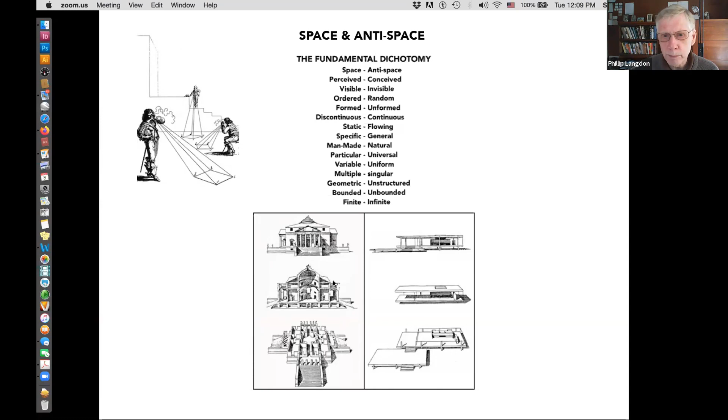Precisely. Mies's fundamental dichotomy between the two types of space is that one is unstructured, unbounded, and infinite, and the other is geometric, Cartesian, and made into shapes and forms which are almost as present as physical forms themselves.

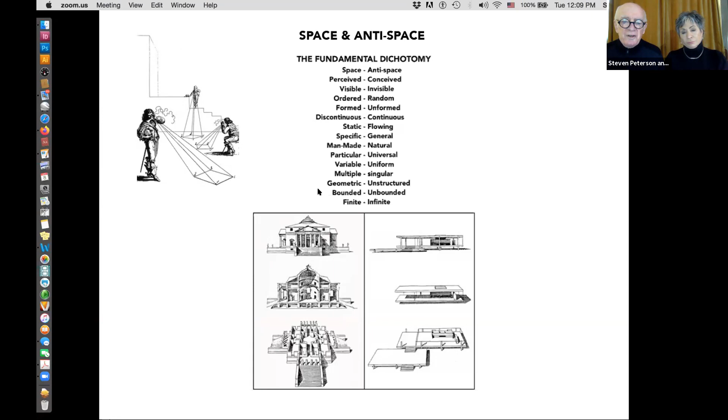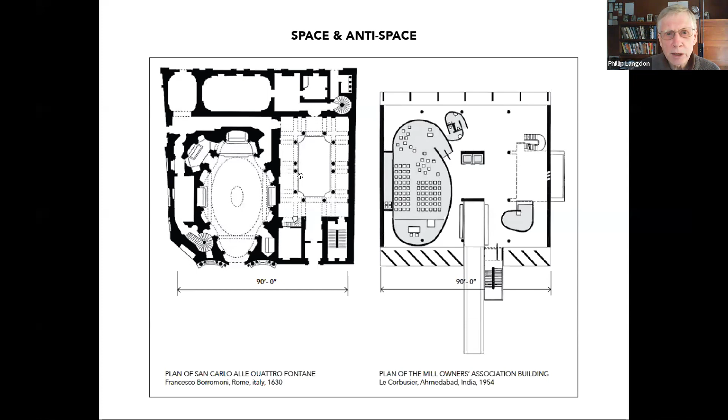Well, the virtual thick wall, the poche, empty spaces within a frame, can actually be applied today quite easily, and it's done so frequently. The point is that the overall construction of the spatial sequence has to admit to the fact that you're not letting space flow through, but stopping it and defining it. You can do that with thin walls - Borromini's plan could be made easily with thin walls.

Barbara, you were saying this morning that you could take down the thick wall between the chapel and the cloister courtyard, and it would show - the whole thing could be made out of thin walls bounded in a frame of solid walls.

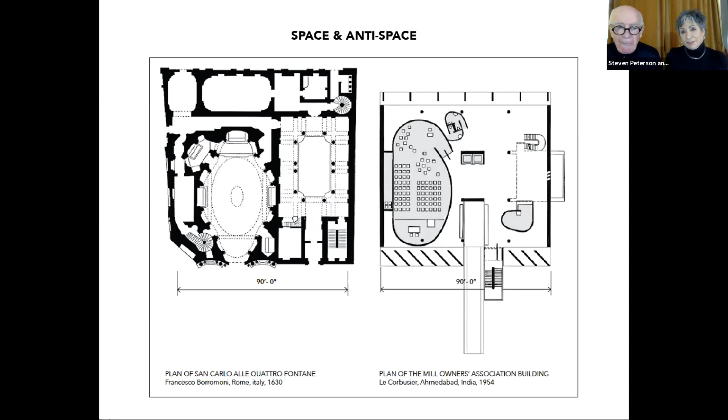And I would add that on the next slide, the same comparison could be made at the scale not only of architecture but also of the city - on the left, Saint-Dié, Le Corbusier, being compared to Parma. The same idea of flowing space and objects formed by...

Sorry, excuse me, our dog is calling. Our dog has brought a squeaky toy to the conference.

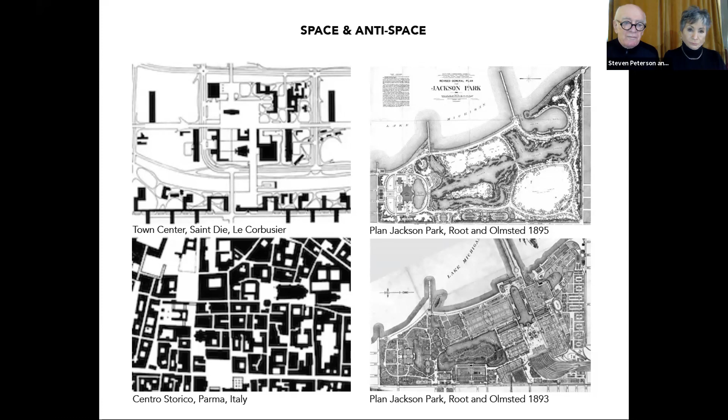I'm looking at the Parma plan, and it looks like there are all these different outdoor spaces that would be interesting places to be and explore, with many different characters, whereas in the Corbusier plan, you don't have that richness of close experience around you. It's true, there's no differentiation really, there's only one place, just bigger.

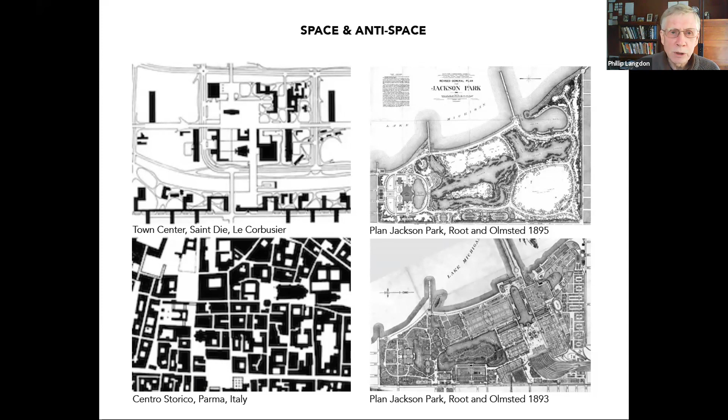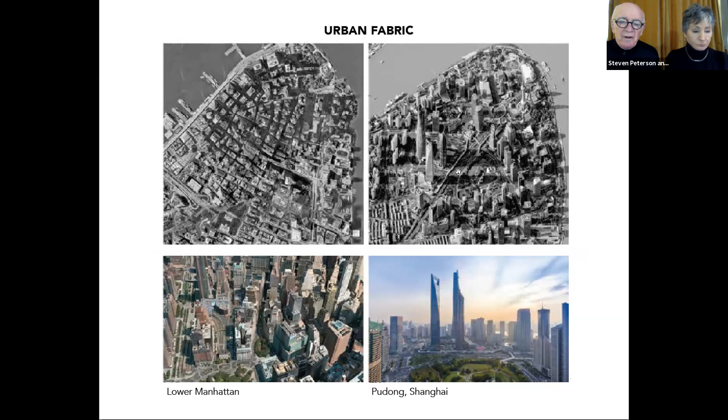Here's an example of two urban fabrics, or urban layouts, so-called—only one actually has an urban fabric. The word fabric is important to use rather than urban texture or streets and blocks.

Because it is literally a fabric, an interwoven interconnection between solids and voids that allows you to walk and experience a multiplicity of places.

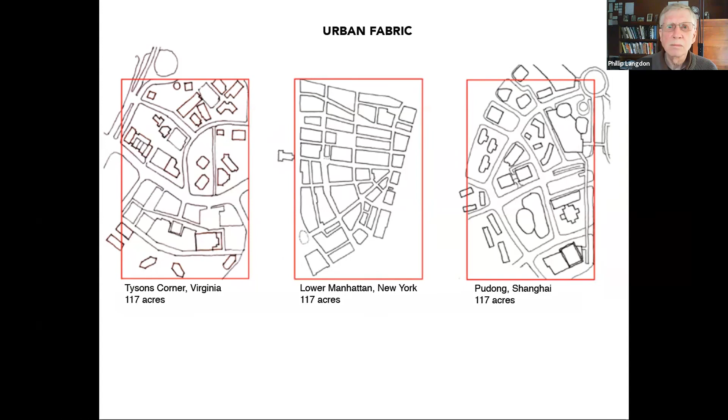The left picture of Tyson's Corner, Virginia, was a 60s edge city. There's no connection between the parts of the building, and the roads run around randomly, unconnected to the surfaces. And Pudong on the right, all of these are the same acreage, same scale, same area.

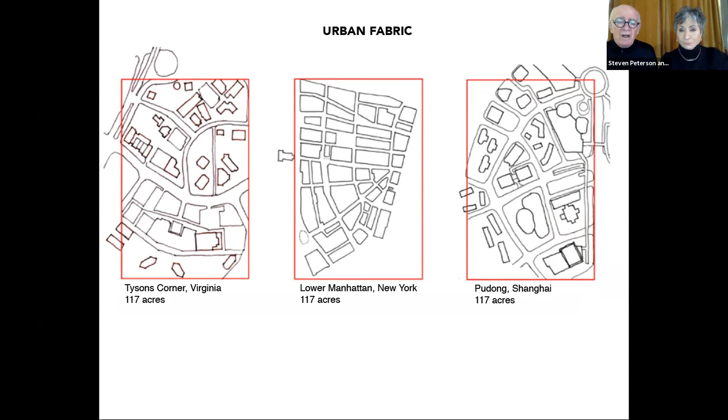The Pudong, in the end, you can see there's no relationship between buildings. And critically, in both places, other than Lower Manhattan, there's no blocks. The thing that is essentially missing from the urban fabric is the block. And the blocks are destroyed by the preference for anti-space, because everybody wants to break into the block and get in the backyard and walk through everywhere. And pretty soon you have chaos like at Pudong, just eradicating it.

Let's look at the next. So these are 4 examples of urban fabric: Rome, Paris, Manhattan, and Phoenix. Is it immediately apparent that Rome, Paris, and New York are urban fabric cities? To elaborate on that question, they each have a very distinctive pattern. The fabric to each is unique.

One could identify Rome by its public spaces, which look very different than the arrangement of the public space in Haussmann's Paris, which is again very different than the arrangement of the public space in Manhattan. What's curious is in all 3 of those examples, there are approximately 33% blue stuff - that is, the open space area is identical, but the way it's distributed within the city is very unique and different from one another.

In Rome, the intimacy and the smallness of the blocks provide a certain - and anybody who's been to Rome has experienced that amazing sense of urban closure. Paris is at a very different, more metropolitan scale, and New York, of course, because of the repetition of the 200-foot block dimension. Phoenix, on the other hand, jumps up to 60% open space.

As one could see, all of a sudden it's no longer really - although it has a gridded block structure, as you could see in the aerial view - when you look at this bluish figure ground, you realize the open space has nothing to do with the actual formation of the block unit. It looks like it makes me think of a city that's been flooded. You have these buildings, but they're all independent and they don't form any spaces that are interesting to be in, and they're all on a road grid.

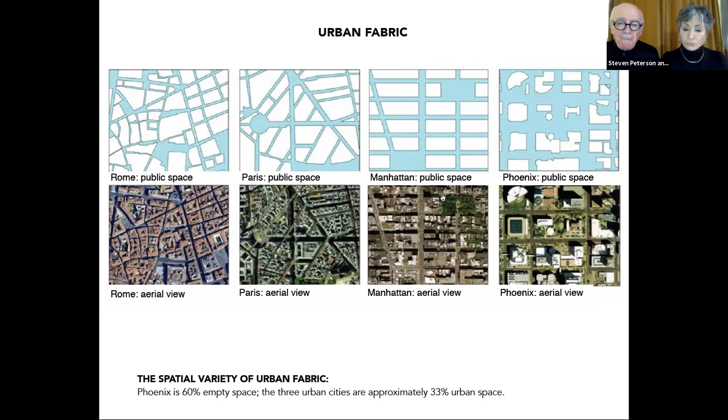Move faster. Here again, a diagram - a quick point here - the spatial network diagram in Lower Manhattan, and then two depictions, 1867 and 2018, showing the development of the blocks over that period of time. The point simply being, you can build new buildings on an existing urban fabric. There was an assumption that if you had to make modern buildings, you had to tear down the fabric in order to achieve an ideal condition for their placement.

Lower Manhattan - it's quite remarkable. Wall Street was rebuilt every 20 years, I think, for about 200 years. The scale keeps going up, Trinity Church keeps getting smaller, but it's an example of how the fabric is something that can be maintained over long periods of time.

So the 1867 view is made up of buildings generally about how many stories? Oh, 8 max, 6, 7, 8, yeah - basically reachable. And then over time you get towers on those same blocks, but also still 8, 10, 12, 20-story lower base buildings that are below the towers are also built. The urban design, this urban fabric in this drawing, applies to both periods of time.

The city as an urban fabric is interwoven between solids and voids and stays that way. Only the buildings change, and architecture fits in.

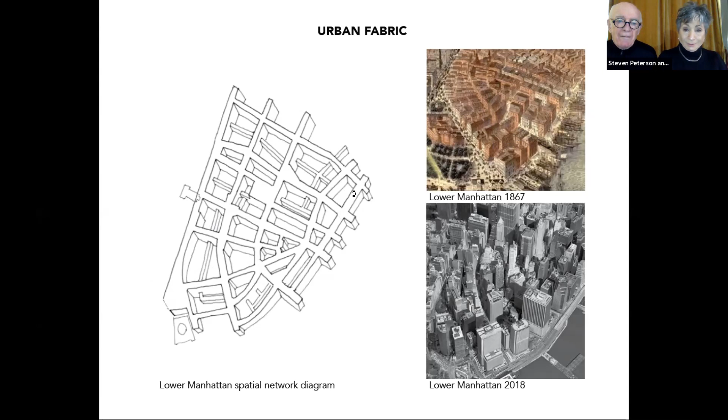Okay, so this is the conceit, the molecule of urban fabric. This was the attempt in the book to try to actually break apart the components that make a successful urban fabric, as well as the molecule goes from the top, which is the urban fabric - an interactive composite of both voids and solids - and urban architecture, and how the building and the fabric relate in this very complex, elaborate intermingling of elements.

What's interesting is... sorry, Phil, go ahead.

I was thinking about the Philadelphia Savings Fund Society building, which was one of the earliest international style towers in the United States. The thing about that building is it actually has a base—it doesn't just go up straight from street level to the top. It has a base that's somewhere around 2 to 4 stories high that makes it fit into the streetscape, which modernists later got away from.

Yes, so the plaza was introduced as a setback, which has destroyed the whole urban fabric and the membrane of the block edge. So in your book, you talk a lot about ways of fitting towers in—maybe you should say something about the tower being entangled in a block base and alternatives to that.

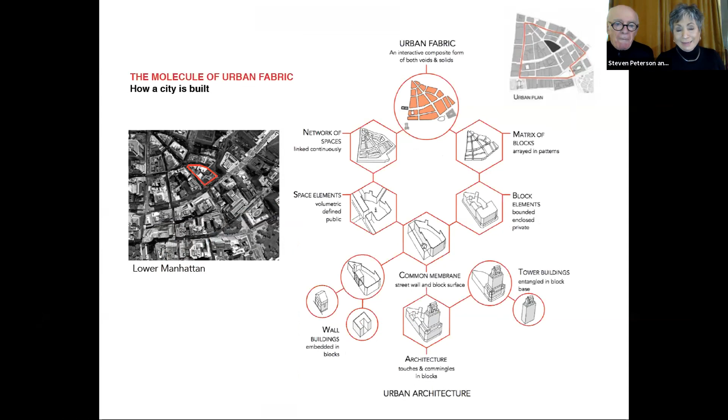Well, this little diagram describes it. This is a block, the one outlined in red in the previous slide in Lower Manhattan—that little red thing—which we take apart and analyze more specifically. There's a photograph of it, 75 Broad Street, quite a large building. As you can see from the sketch, the block is actually made up of many different buildings from many different points in time. This is aspirational, trying to show that this is a good condition, one that should be supported in the design of buildings in the future.

That is what you're saying—the tower essentially has these lower elements which blend in and reinforce the existing scale of the streets below and its adjacent buildings. So it is both embedded in the block and entangled in the block, that is its base. The tower gets entangled in its own base in a way which allows it to operate on multiple scales. These words, embedded and entangled, are meant to focus attention on the integral nature of the block as a common element, and they're derived from quantum mechanics as terms—so you get the individual atom embedded in a larger structure and entangled at its base in the daily street life of the city.

One of the things we should mention is the question of why are we talking about towers? I think your rationale is that we have an exploding population of the world and tremendous urbanization going on, and for ecological and environmental reasons we need to accommodate people without sprawling across the entire landscape. So one way to do that is to build towers and put people in cities, but also create good environments at street level even with towers. Is that how you see this? Towers are inevitable—the question is how do we handle them in cities.

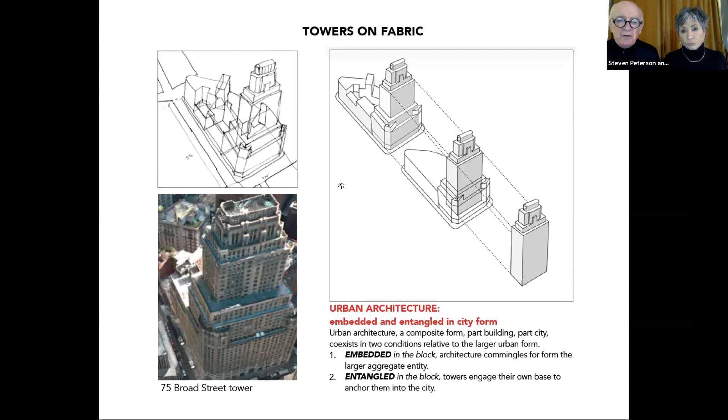Another example of this—towers have always been part of cities. I suppose the emphasis on towers in the book is partly a question to the CNU, which is often depicted as being anti-tower, anti-high-rise. So as you say, Phil, we're beginning with the notion that cities are densifying, the world's population is moving into cities, and you must accept the tower to maintain that. Historically, towers have always been somehow part of our existence, and therefore we should embrace them.

The Helmsley building is a great example of one that has a beautiful base that contributes to the appeal of the street, whereas I don't think that's true of the former Pan Am building that sits behind it, which offers a lot less in terms of urbanism than Helmsley does.

The amazing thing about the Helmsley building, as you know, it used to be called the New York Central Building and stands at the end of Park Avenue, and you drive through it. It looks like a building from the 20s or 30s, embracing with its arms the adjacent fabric across the street, but it blocks Park Avenue. Those two archways on either side are literally a place where cars, not trucks, but cars and taxis drive through and down to 42nd Street beyond the other buildings in the block. It's an amazing modern dynamic.

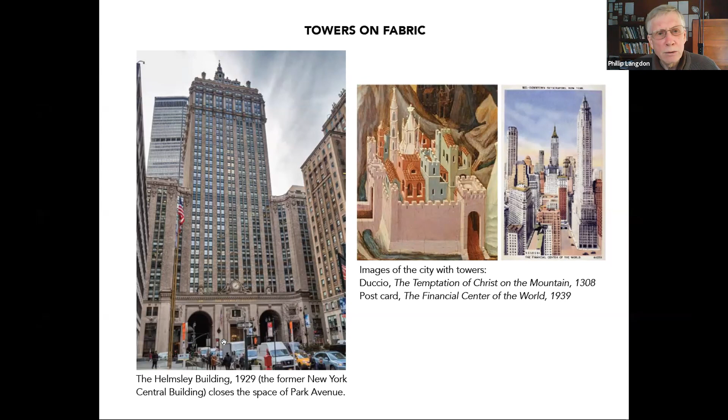And yet this is the same city that is now seeing Hudson Yards come into being, which is kind of the horrors of modern real estate development in a big city. Michael Kimmelman, the New York Times architecture critic, wrote that Hudson Yards epitomizes a skin-deep view of architecture as luxury branding—each building exists to act as a logo for itself. He goes on to say that the buildings look like perfume bottles on a shelf in a department store window.

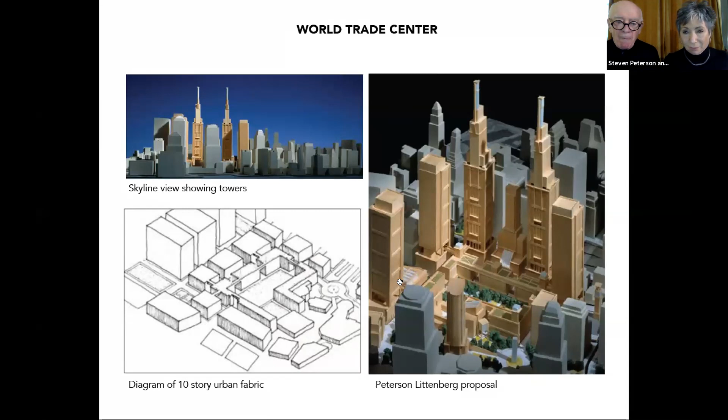Case in point: the proposal for World Trade Center, with urban fabric on the ground and the towers up in the air. This theory was put into effect in our proposal for the Trade Center. Here's an open site, World Trade Center, a replica to scale of Rockefeller Center, and how one could have been built on that site quite comfortably - 10 million square feet represented in that little wooden model. 10 million square feet was the size of the 2 original towers, exactly the same as the RCA building and surrounding Rockefeller Center.

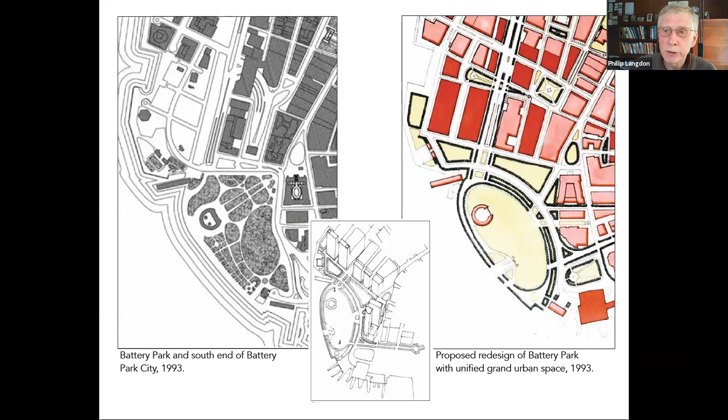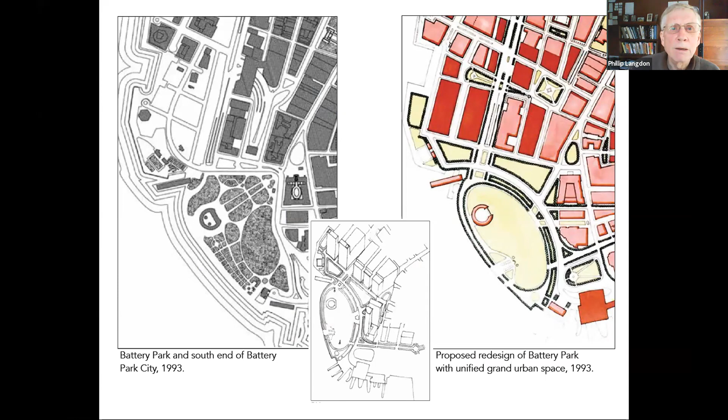No, you can give the appearance of solids with a lot of glass in the facade, like in Amsterdam. Facades of the individual buildings are 80% glass in some cases, but the bounding surfaces holding the wall together and defining the subdivisions of the glass are such that it gives the appearance of a surface and a solid membrane. This is the reason we use the word membrane to describe the outer surface of the block, because it does not have to be solid walls or old-fashioned masonry construction to produce that effect. Or punched windows - you could have a frame expression, which is what makes Amsterdam so interesting. They knew how to get light into the building and maximize the glass surface, and yet nobody would ever suggest Amsterdam is not an urban place. So I think, yes, it could.

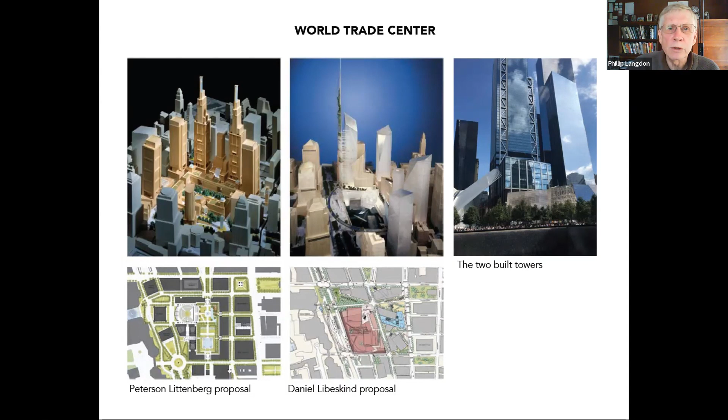Soho has beautiful buildings from the 1880s and 1890s that are mostly glass, inspired by other examples such as Venetian palaces. Are these 'glass' buildings something to look toward as positive examples of urban glazed surfaces? Absolutely, yes, for sure. One of the most urban places in the world is Soho, with the buildings and the grids. The framing of the facades with classical elements could also be abstracted and become just purely gridded elements, and that makes an amazing surface on a street wall.

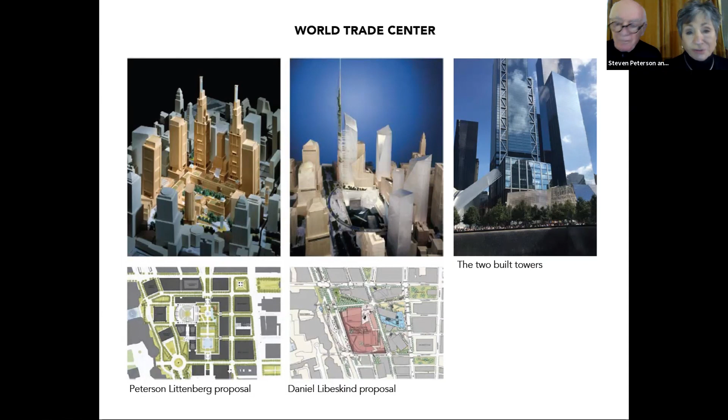And I would say Venice is very interesting because Venice is a city built on piles, so in a certain sense it is emblematic of a modern building construction. It is not a wall-bearing city, so in that sense it's very modern. So the idea of frame, which is not talked about, the frame itself is something which has enormous elastic capacity to mix solid surface and glass areas that produce extremely successful urban surfaces.

Another question: would you mind speaking on how better urban spaces could be redeveloped along waterfront in places such as Pudong, where there's little to no pedestrian access to the ground?

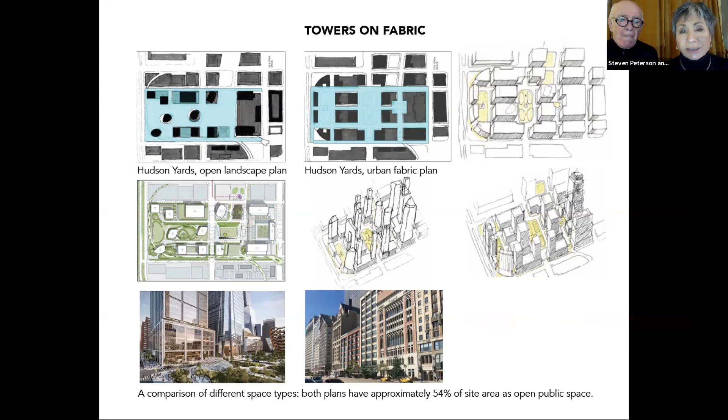So curiously, maybe Jackson Park would be more to Olmsted's liking than Central Park even. He had written about how he objected strenuously to the imposition of the crossroads moving across at various points in the park - he considered it a kind of intrusion.